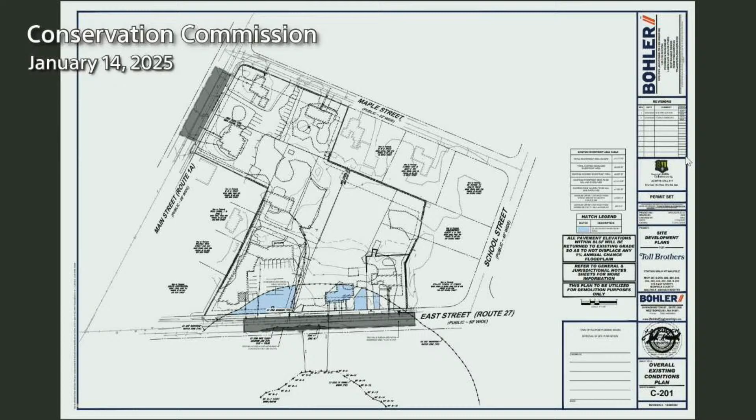Resource areas associated with this property include Springbrook, located across or south of East Street, and bordering land subject to flooding that extends to elevation 139.5, occurring along a portion of East Street. This is important because sections of East Street and Main Street will be repaved after utility installation, shaded here in dark gray, with the darker portion of East Street being where bordering land subject to flooding occurs. Those elevations will be brought back up to existing grade. There's no change in elevation proposed within the floodplain, and therefore no change in the flood storage capacity of the floodplain.

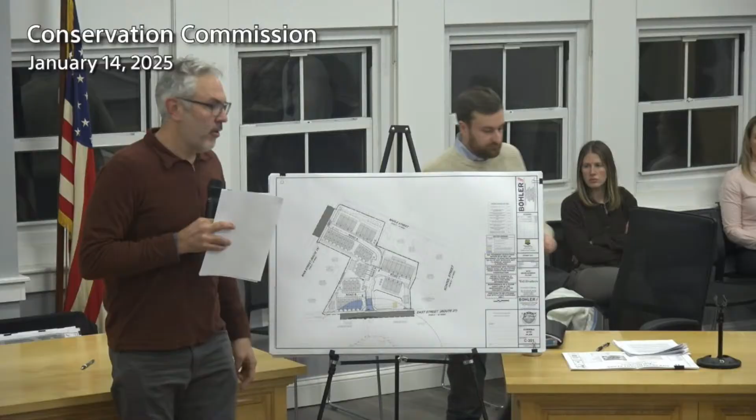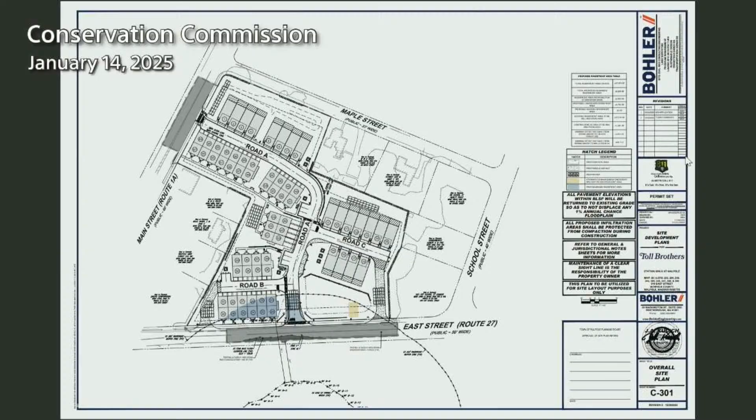Moving on to the next sheet — this is sheet C301, also up on the screen. We're proposing a 67-unit development on the 4-acre parcel, comprised of 8 buildings and a series of roadways. We have Road A, which provides access through the site from East Street to Main Street; the roadways will be 24 feet wide. We also have Road C and Road B, dead-end streets providing access to the buildings located along those. Each unit will have a 1 or 2 car garage, with access provided from the roadways.

We are proposing some site grading on the property to accommodate development. There's a bit of cut and fill — up to 3 feet of fill, roughly, and up to 8 feet of cut. The largest cuts are in large part from the stormwater basins proposed on the property.

Resource areas associated with the development that are going to be altered include the bordering land subject to flooding, which is 1,061 square feet. We also have previously developed riverfront area where, under existing conditions, we have structures, lawn, landscaping, driveways, things like that. Portions of that previously developed riverfront area are considered degraded. With the proposed development, a portion of the southernmost building, a portion of Road A, and a small portion of this access are within the riverfront area that will be considered degraded. Overall, there's a net reduction in the degraded riverfront area by roughly 2,800 square feet, so we are improving the riverfront area by decreasing the amount of degraded riverfront area in that zone.

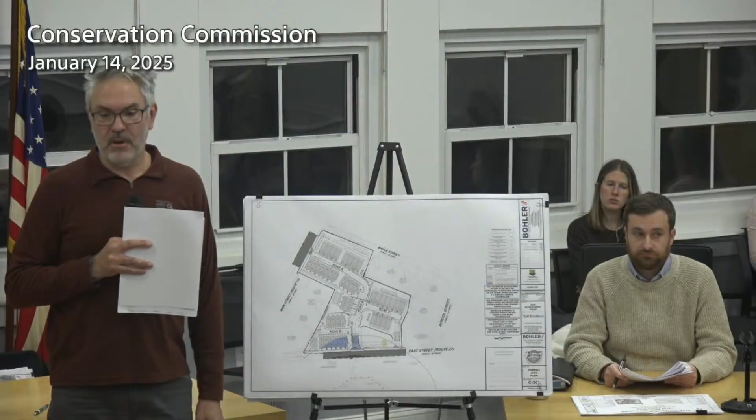Additionally, we're also significantly improving the stormwater management measures on the site. Matt's going to talk a little bit about the stormwater management that we're proposing, but it far exceeds the state regulations and state requirements in an effort to meet your local requirements. With that, I'll turn it over to Matt to talk more about the stormwater management infrastructure, the erosion control plan, and the landscape plan.

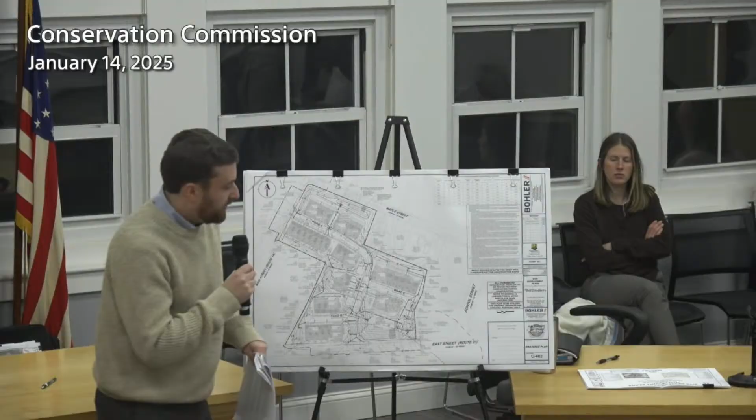Thanks, Rich. Matt Ashley with Bohler. We are now on C402 drainage plan. It'd be better if I stand over here for you guys. It's okay, sorry.

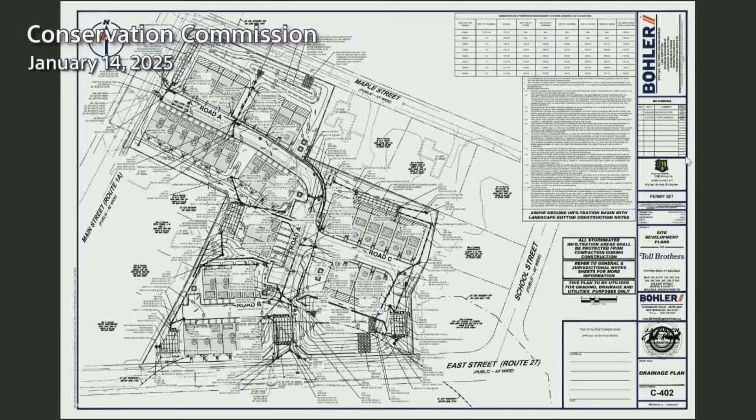So we are proposing a fully state and local compliant stormwater system out here through various BMP measures. Specifically, we have a combination of surface basins, subsurface basins, grass swales, and water quality units to meet all of the state's specific requirements in the stormwater checklist. Additionally, we have been working very closely with the town engineer, Carl, to provide above and beyond that. So essentially, not only do we reduce peak flows for the development, we are reducing volume and containing the 100-year storm on site with the NOAA plus numbers as well. So very conservative stormwater design.

The high point of the site is located right at the corner on Road B and flows down in either direction. This half of the development will go down to a surface basin located between, behind units 1 through 8. This portion is a mix going to a subsurface basin located behind units 9 through 15, and then a couple more subsurface basins located underneath the fire access roads. The bulk of the stormwater is being contained in this surface basin up front, adjacent to East Street and units 16 through 19.

Also, generally consistent with the town's regulation, we came up with a construction phasing plan, more of an erosion control plan, if I can find it. It's going to be 801, if you want to get there ahead of me.

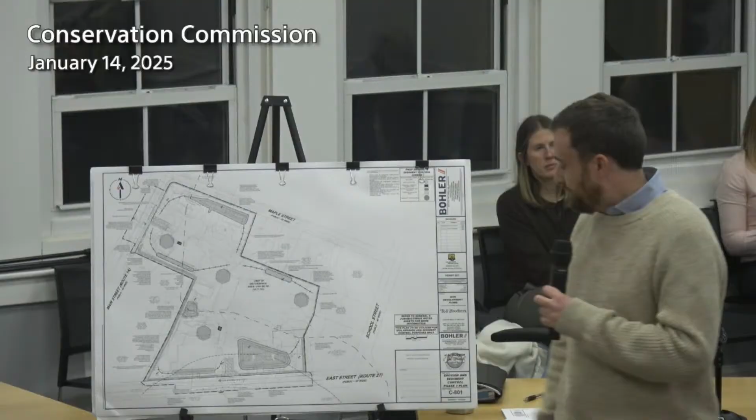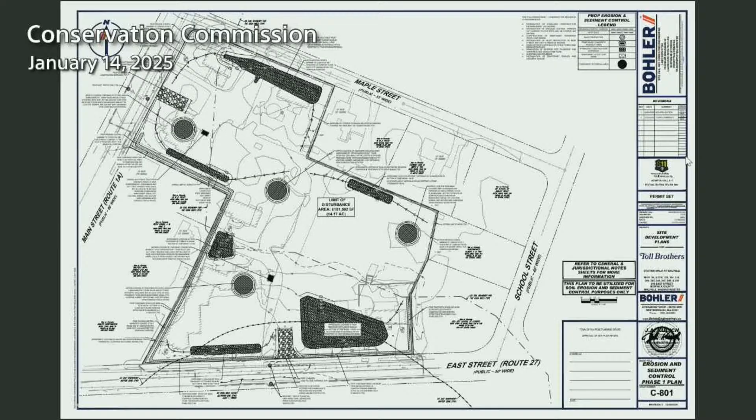The general intent of the construction sequencing is the site will be demoed from what's out there, the existing structures that Rich talked about, and rough graded and padded. In doing so, during that initial phase, we're going to set up temporary sediment basins throughout the site, like I mentioned, this is the high point here, so everything has temporary sediment basins on either side. They will rough in the surface basins during this time, not bring them all the way down to final grade, which is consistent during construction.

The next page, C802, will be the next phase. The site is rough graded, then utilities and roadway infrastructure will go in. The beginning of the first unit right up on East Street will be put in as well, kind of as the gateway to the development, along with the sales trailer located centrally there.

Additionally, working with the town, there were some additional erosion control measures. They wanted us to put in a berm located around the site. You'll see that there as an additional measure, along with your typical catch basins in the roadway having silt sacks. The driveway entrance will have a gravel area to reduce sediment getting out into the roadway. Additionally, it was noted to have an extra barrier go across the driveway if there's going to be a large storm event predicted in the forecast, along with removing the silt sacks so those don't get clogged up.

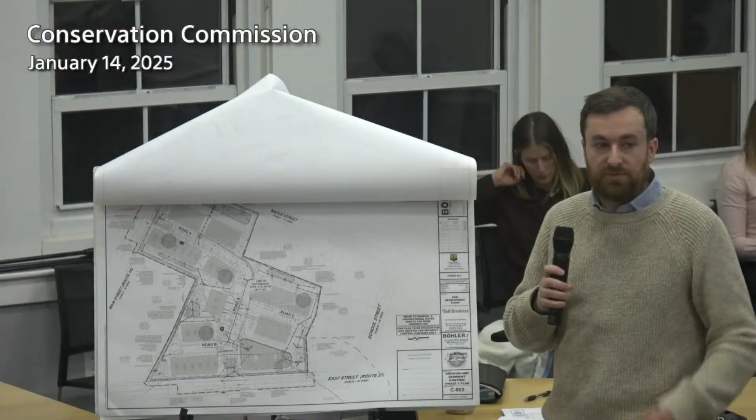The last item here, 803, is just the build out of the remaining infrastructure, housing, and units. Upon completion, all the sediment basins will be turned into final stormwater basins and removed. Also making note not to stockpile anything on those areas that had the potential to reduce infiltration.

Moving over to landscape briefly here, L101, located towards the end of the set.

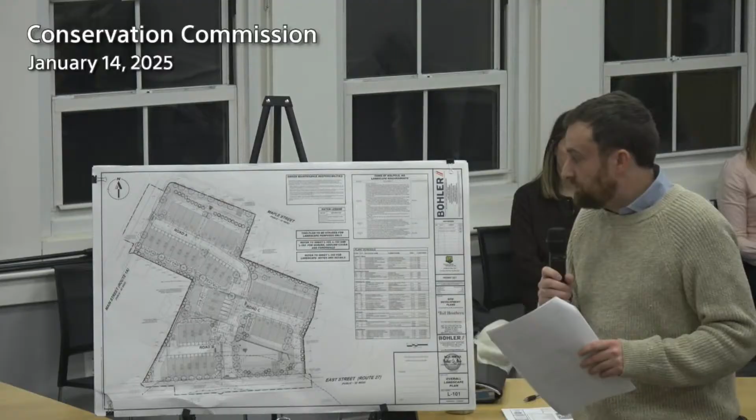Toll Brothers is proposing a pretty robust landscaping plan. We had minimal comments going through this, which I don't see that often when we review landscaping plans. Essentially there'll be over 1,000 plantings throughout the development: 53 canopy trees, over 200 evergreen trees, over 20 ornamental trees, 250 shrubs, 76 grasses, lots of ground cover, and even more perennials.

The real focus on the landscaping package from initial feedback was the perimeter of the site, which you'll see is pretty heavy. There's also the entryway into the development, creating a real sense of arrival on either side with the landscaping, and along the frontage as well. The doorway entrances also have a pretty robust landscaping plan.

In addition to that, we are proposing a low ornamental wall down there. A portion of it is actually used for retaining, and another portion is just a raised knee wall, kind of stone, again to create a nice sense of arrival when you get here.

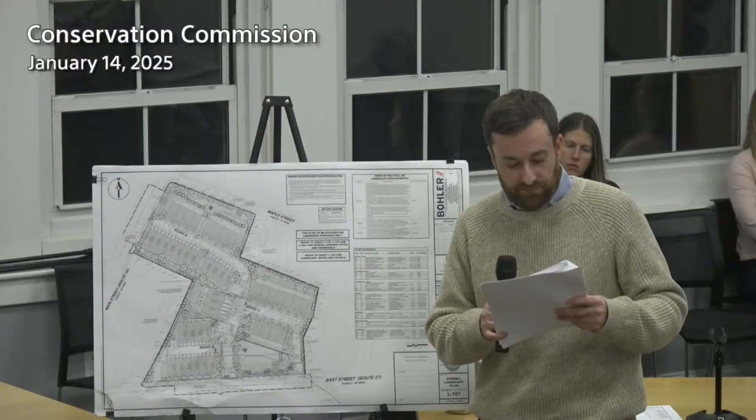Just to recap some of the updates we made from all the comments we had: the erosion control plan that I walked through with sequencing and what we plan to do there, and some additional detailing on the riverfront area, which Rich talked about.

It was requested to add dog waste stations throughout the development, so we added two different ones at equal points on the development—one located near the visitor spots by the entrance, and a secondary one out back near the corner.

Snow storage was added and detailed on the site plan. As for trash handling, there is no central trash area—every unit will have their own bins located within their garage. They'll take it out during trash day, it'll get picked up, and they'll put it back in the garage when they're done. So everything is done internally to the house and won't be stored outside at all.

I think that was largely it for the big updates from the comment letter. Carl responded today about the updates we made to his comments—in his words, the general comments were thoroughly addressed. We still have a handful of items we're working through with him and the town, but we brought his list significantly down, which I was very happy to see.

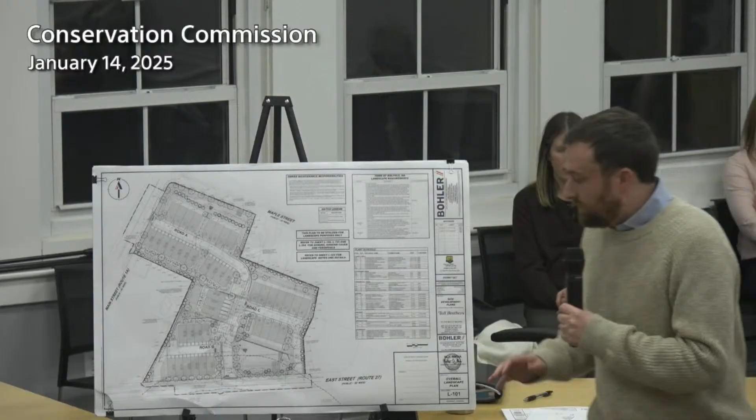With that, we'd be happy to answer any questions that the board may have. Good, thank you.

Landis: Mr. Chairman, there was a letter submitted by the town engineer. I don't think you have to read all items unless you want to, but it was summarized that most of the items brought forward early on have been addressed. There's a few things that still need to be addressed on the plan, which are listed in his letter.

There's a couple of items he included in his letter that I had also asked to be fixed with the operation maintenance plan, including an annual report form so it could be submitted to the Conservation Commission each year. One of the other outstanding items, listed as number 18 in his letter, is the off-site mitigation we were asking for to relieve a stormwater issue across from the new development.

Those are pretty much my comments at this point. I know you're going before the planning board tomorrow night, and I think it's preferable that we continue this until you work out the final plan, deal with the final revisions, go through the planning board again, and maybe resolve the off-site mitigation. But those are the only comments I have at this point.

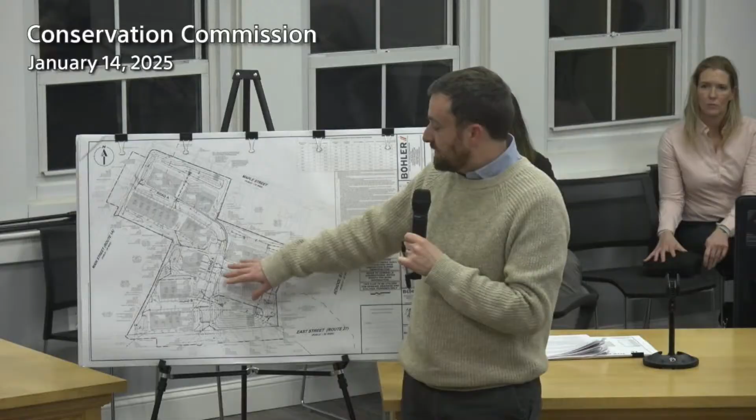There was another question, I believe, and I'm sorry, I forgot it - the method of cleaning stormwater at the catch basins. Absolutely. In the back of our drainage report there's a full O&M plan for what we recommend for cleaning. For the catch basins, it's inspections every 6 months, and when there's a certain amount of sediment measured within those catch basins, they get vacuumed out or cleaned out in some manner and removed.

So is it just water at the bottom again? That doesn't explain - how much of the oil and other trash is collected there, and what's the device you're going to use?

I think the final device used will ultimately depend on the maintenance company contracted for this. Historically, what we've seen is there are sumps and hoods in these catch basins, so trash floats on top of the water. The hood makes sure the pipe is submerged so trash doesn't get into the pipe network, and oil floats on top of the water. In that scenario, typically a vac truck will come in and vacuum it all up into a tank and take it off site to dispose of appropriately.

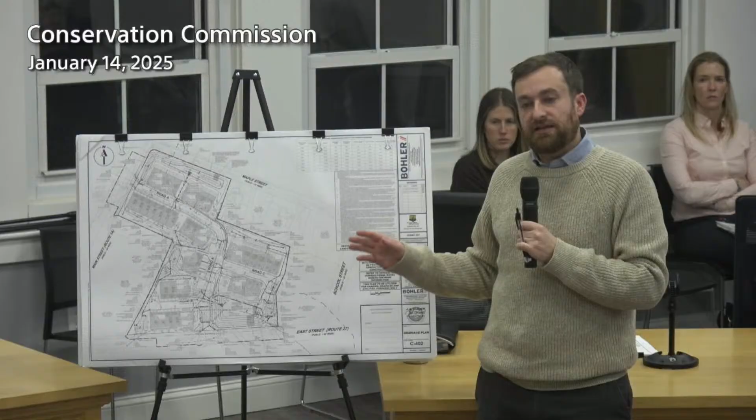That doesn't tell me who the manufacturer is and what device. There are several devices on the market and I'd like to know which one you're choosing. Good question - I believe our detail specifies a device or an approved equal that the contractor should be using. An approved device - what approved device? You're not getting it.

Maybe we could have a special condition that requires Toll to notify the Conservation Commission of the actual apparatus that's going to be used. You mean the type of machine that's going to clean the catch basins? No - okay, so just clarify what you need, Al.

There are several different catch basin designs, brands, oil water separators - there are several of them on the market. It's usually specified on the plan which one they're going to use. So you want to see the detail of the catch basins? Okay, apologies, I misunderstood the question.

We do have the specified product detailed on our construction details in the C900 series. C900 - Carl was very specific about making sure this was on here, probably a typical comment.

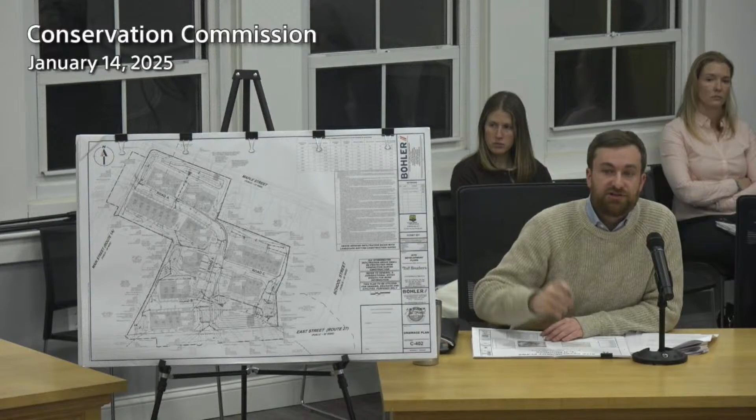Okay, so if we get to a 100-year storm event, Springbrook may be in trouble too, overflowing. Keep in mind, one last comment to really nail this point home - we also have a foot of freeboard designed in our basins as well. So even above the 100-year, we still have more storage. We did go over that with the town engineer.

Betsy? I know you've got further to do with the planning board, so maybe we're not talking about this tonight, but improvement to the Springbrook riverfront is important, and I don't think just some plantings, which were gonna happen anyway to show an entrance, do it. So I'm actually in favor of something to do with the storm sewer that is not handling runoff properly in front of Springbrook should be included.

I may have missed it earlier, but is this maintained as a private development? Yes, it is. Okay, so there'll be a homeowners association - that's correct. And those are the ones, the association is responsible for maintaining the structures. There's been a raccoon infestation - I don't know if this is the right place to address it, but they've had people out to address the rodent issue, mainly raccoons. Is that something, should I address that tomorrow night?

Yeah, I think we all love raccoons at our house. Come on, six units in our place.

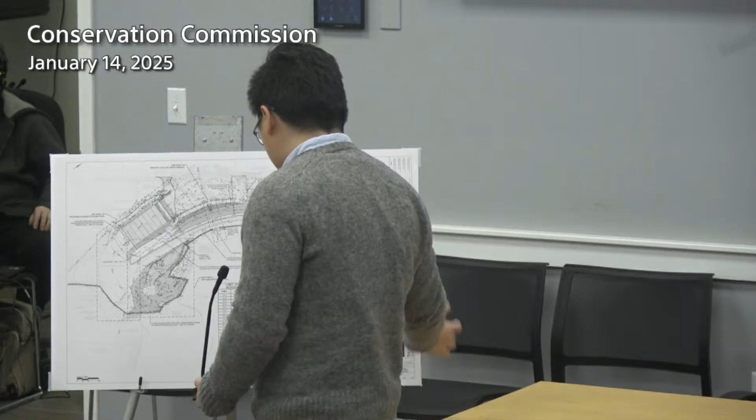Our phase is to try to rehabilitate that. So let me pull up this proposed conditions plan real quick. The first thing we have to do is make sure that the pond contains the water associated with that federal design criteria, which they call the freeboard hydrograph, which turns out to be the probable maximum precipitation flood.

We're on sheet 7 for the proposed site plan, in the big set and what you handed out tonight. What we handed out tonight is just a copy of what we have for poster boards, but the plan set is the plan set. So the first thing is we have to make sure that the pond holds the amount of precipitation needed for that PMP.

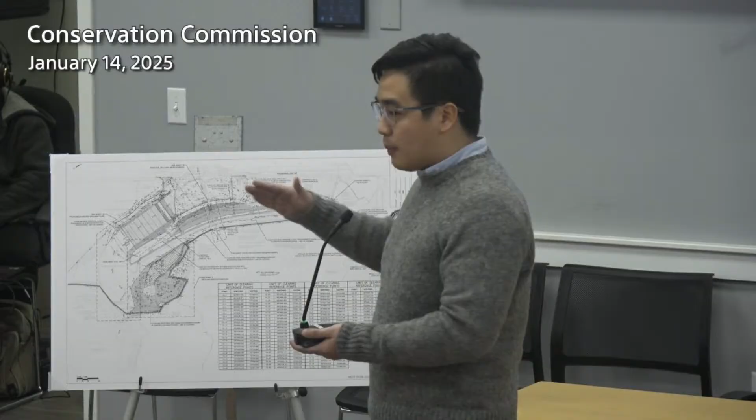So we're raising the dam a little less than 2 feet. Another portion of that is because we're raising the dam, we have to meet slope stability requirements on the downstream slope, so the slope has to be buttressed out towards the downstream side. Additionally, the perforations of the toe drain, the internal drain structure inside the dam, do not meet federal requirements right now, so we're also proposing to dig that out and replace it with a new toe drain that would meet federal requirements.

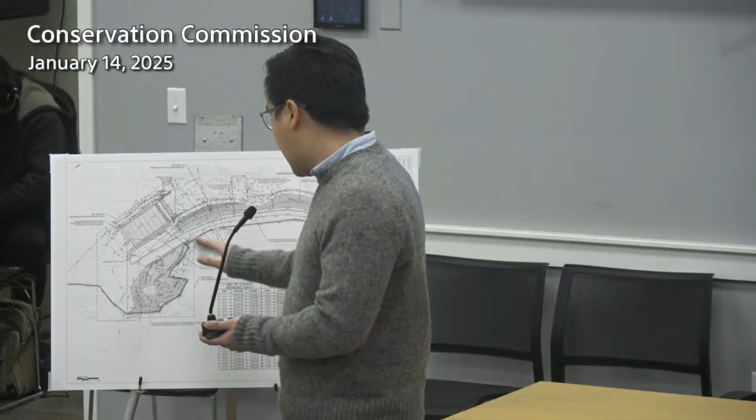Moving back to the internal drain structure, I have this section for you folks. As you can see, we're raising it 2 feet, but to maintain slope stability, we're going to need a 3.5 to 1 slope that buttresses outward to the downstream slope. That's a little shy of probably around 20 feet towards the downstream slope.

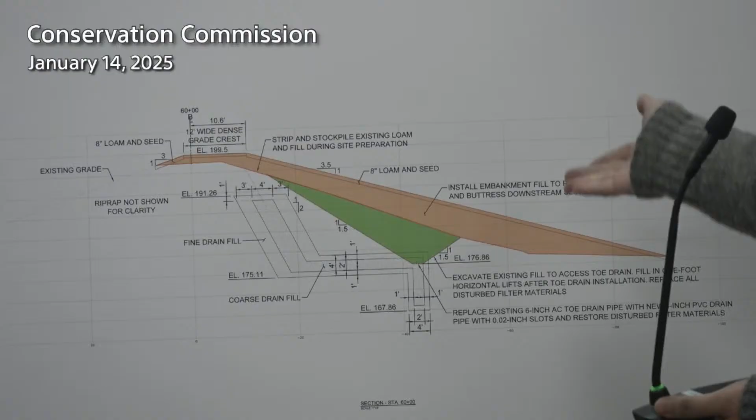The orange is what we're filling in addition to the current geometry of the dam. The green shown here is what we're excavating from the existing dam to get to that toe drain and replace it.

Additional impacts because of that dam raising and buttress: there's an existing concrete structure right here. This is the primary spillway where regular flows flow into and out to Spring Brook. The concrete structure, because we're buttressing the slope, has to get pushed further. It's a very old concrete structure, and we can't just pick it up and move it without significant damage, so we're planning on demolishing the existing structure, extending the pipe, and replacing it with a new concrete structure at the new toe of the dam.

In addition to that, we are adding an access bridge towards the inlet of the dam, so it's easier to access the controls and maintain the flows of the impoundment and do maintenance at the inlet. Right now there's no access bridge over there, so the folks at the town have to take a small boat to access those controls at the moment.

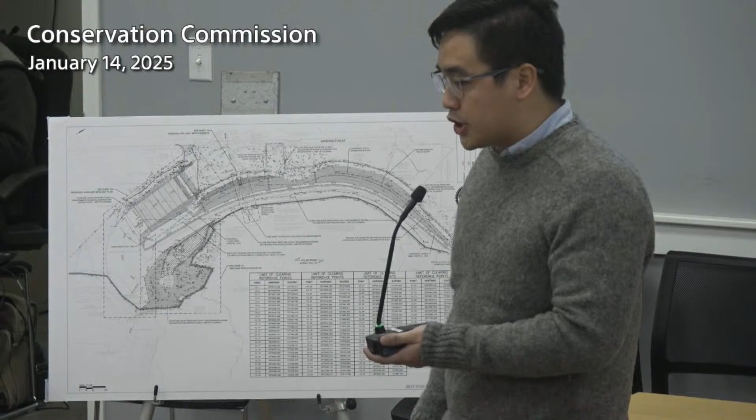In addition to that, current dam safety regulations guidelines recommend that we remove trees 20 feet from the dam embankment portion, so there's a lot of tree clearing associated with this at the downstream toe, all the way across over there. And because this acts as a barrier for debris to get stuck when this tries to activate, we're going to have to clear the trees all over this portion as well.

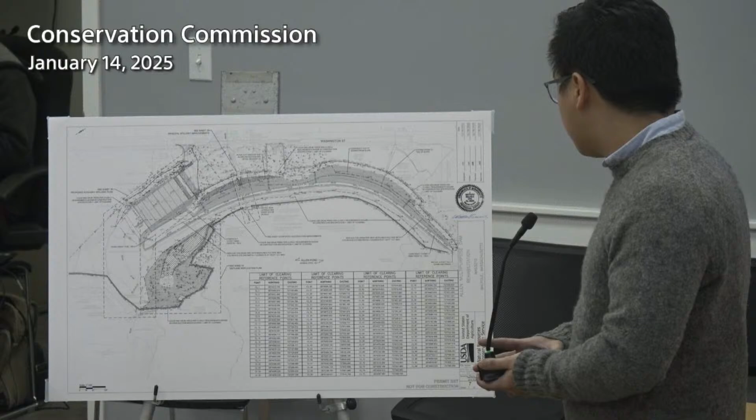But other than that, that is the proposed conditions currently designed for the dam.

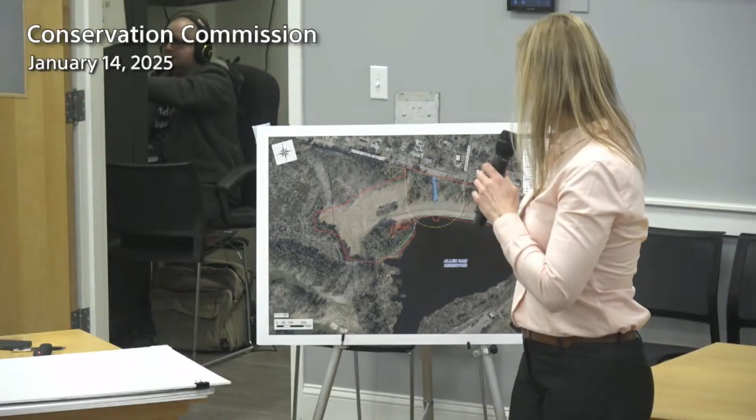Beginning on the northern portion of the dam is sort of the easiest resource area to see. This is a flagged bordering vegetated wetland.

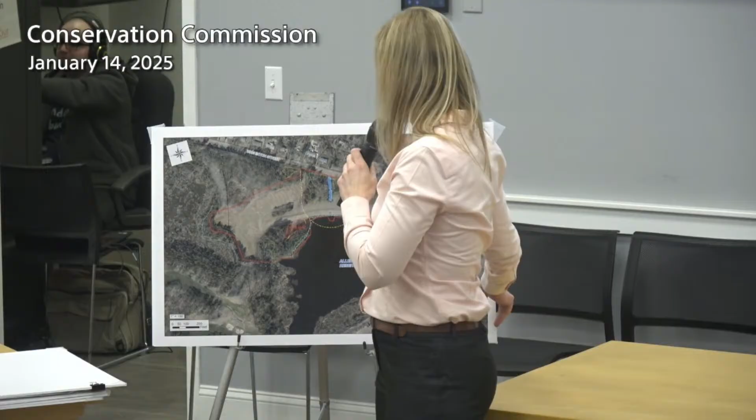Are you on the first or second one of these? I am on the first, or I'm on the second. Let's see, on the backside of... yeah, on the backside. There you go, yeah.

Beginning in the north, you have this bordering vegetated wetland that's flagged, and it works its way up to what were previous embankments related to an access way to the dam. On the other side, also a second bordering vegetated wetland in green flags. You'll see a dotted red line just outside, squaring that off. Those are the flags we altered when PAR went back outside and checked the flags for the site. We saw that the resource area was actually bigger than initially flagged.

That's the new expanded resource area. In the center is Spring Brook, which is the downstream portion, riverfront area, and also land underwater to be altered because we're going to be installing that extended primary spillway.

You'll see in yellow, there's the buffer zone, and also in purple, we have buffer zone around the outside. Green flags encircled in orange, also along Washington Street, is an isolated vegetated wetland.

Working the way up the spillway, this is somewhat of a complicated wetland complex. From the water's edge here at the bottom, there's a small bordering vegetated wetland that was flagged. It has a stream connection, an intermittent connection to a secondary bordering vegetated wetland. We think the water generally flows from the pond in and out.

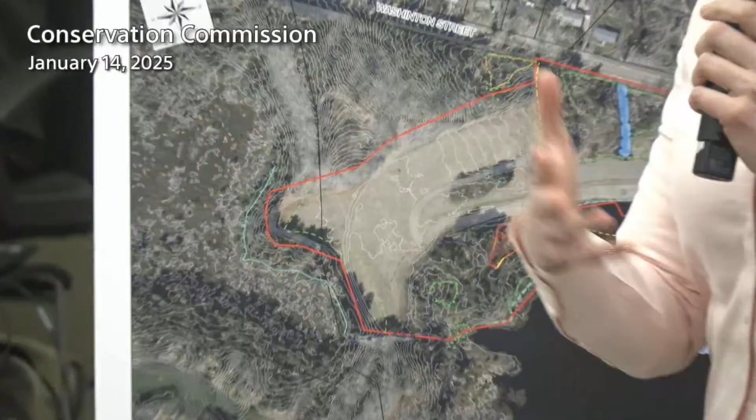There's an intermittent stream that connects to this green circle. We saw some flow here between these two at the bottom. There's an outlet, and we think it probably would flow up and through based on the topography of the site, and also the way the vegetation has traveled. There's some invasive species up in this top corner that really wouldn't have any other way to get up there if it wasn't traveling by water, and that's why you have it labeled as bordering vegetated wetlands rather than isolated wetlands. That's correct, right.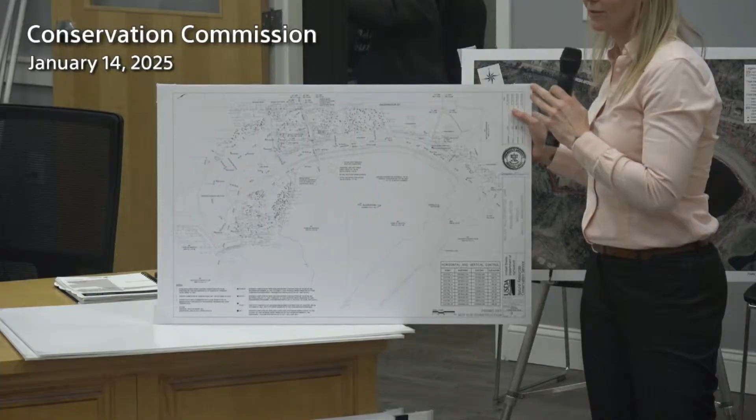This is the plan as presented, sheet 3, and this is the one we know we got feedback on. It has all the same wetland flags. They're numbered on this plan and also shows all of the trees. There are trees in the wetland, and there are trees throughout this area along the pond that are going to be removed as part of the dam design, just as Victor mentioned.

We want to make sure we're really clear about that because it's not something that's regulated by the Wetlands Protection Act. However, it's definitely going to alter the landscape, so we don't want anybody to be surprised.

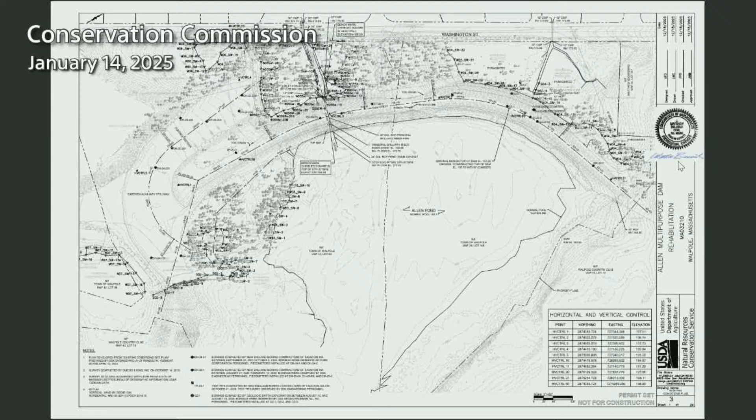Okay, now moving on to sheet 7. On sheet 7, you can clearly see where the alteration is planned for the dam. As Victor was saying, the change in slope on the downstream side of the dam is going to actually require us to push the slope into these two bordering vegetative wetlands on either side.

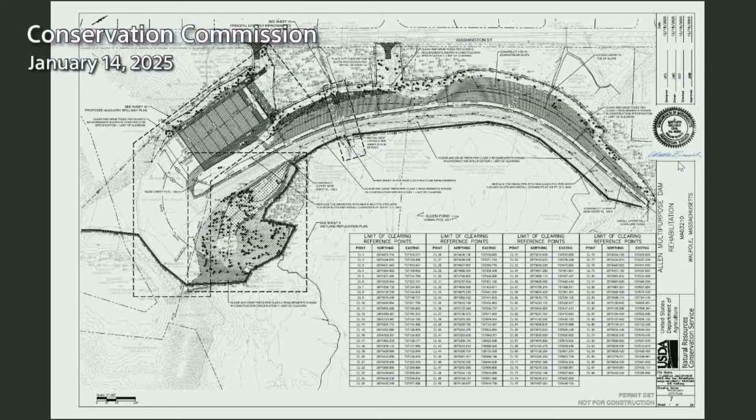So you'll see in red, we've outlined this is the permanent impact to BVW to be filled. And then in the orange color here, right outside of it, is temporary impact, likely going to be used as part of the limit of disturbance for construction vehicle access as they're building that new dam grade, the 3-to-1 slope.

In addition, there's small impacts to the land underwater, again related to the principal spillway. No anticipated impacts except for some temporary related to installing erosion controls and maintaining the site on the upstream side of the dam.

So you'll see here, this is the shape generally of the proposed replication area. The idea here, of course, is to connect it to the existing bordering vegetative wetland.

Just as an aside, because I think the question will come up as far as the limit of work right here, we have this small shoreline section that's not included in the limit of work. One of the reasons for that is that the geometry of the auxiliary spillway is exactly this, so the design follows this line right here. We're trying not to impact more of the shoreline than we absolutely have to in this case.

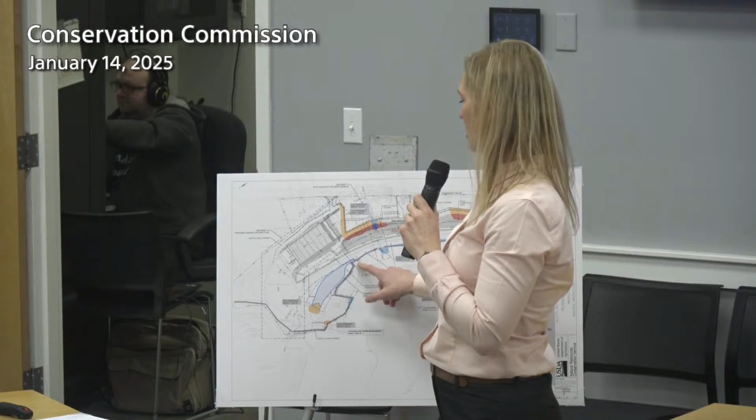It's also true that there have been some archaeological fragments surveyed and discovered as part of the survey work for this site for the federal government review, and we're pending additional survey to understand a little bit more about what's there, but we know generally this is the site, so we tried to give it as much space as possible without impacting it.

So that is the proposed impacts here to the site. The project is going to be subject to a water quality certification. It is a limited project under the Wetlands Protection Act, so the fill is allowable because we are maintaining an existing dam.

However, we do need to mitigate for a certain amount of the wetland to be impacted for the water quality certification. So the replication plan shows something of a basin on the right against the dam structure itself, and there will be some very low plantings installed in that basin for the purpose of maintaining the spillway design requirements.

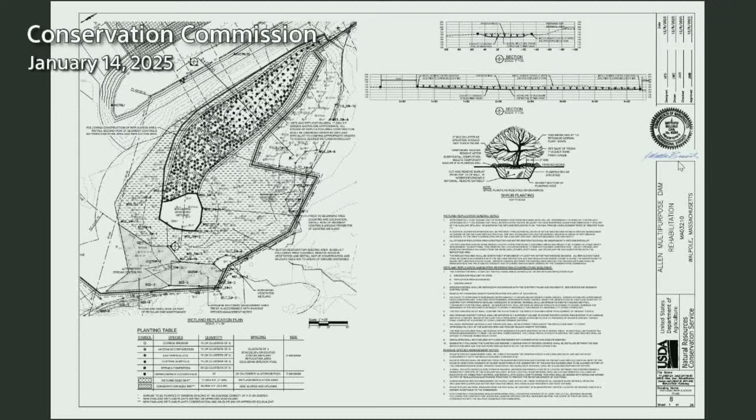Just as Victor said, we're not allowed to replant trees. We have to maintain a certain height of the vegetation, so we had to choose plants that were going to continue to be small so that they would not become an obstruction in the event that the spillway is activated.

And then as we're moving out, we have these cluster plantings all set in 3 that are intended to encourage wetland species to grow and also connect to that bordering vegetated wetland here. This whole portion outside is going to have to be maintained with conservation seed mix.

Part of the mitigation includes the removal of a small section of Japanese knotweed that's taken hold right here on the corner. We'd like to try to take that out as part of this so it doesn't have the opportunity to really take hold and do a lot of damage on the shoreline with all of the earth work that's about to take place.

So with that, we're happy to answer questions and go through any of the slides that you're looking for. And we're looking forward to continuing, and we'd really like to come back on January 28th if possible.

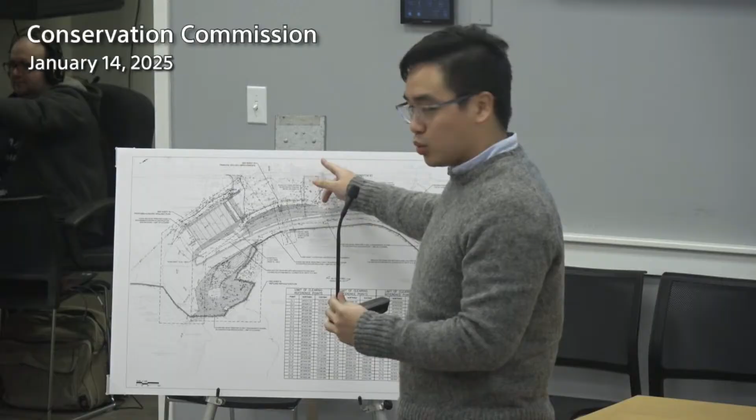So currently, there are 2 access points to this area. There's one over here with a swing gate, and then there's one clearing over here. Personally, I found the parking here much more safe coming in and out because it's a much larger area rather than backing up into Washington Street.

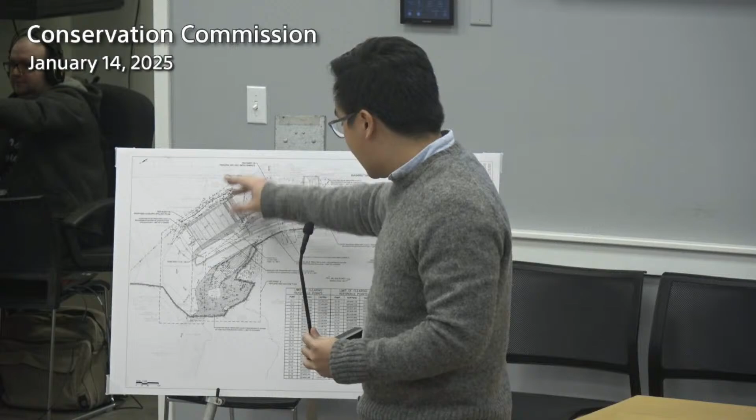We were discussing it with Carl a couple of days ago, but this retaining wall can be pulled back so you can maintain access. Unfortunately, we still need this terminal structure, so we're trying to figure out access over here, but this access will be maintained for construction and future purposes. With the tree clearing, it's going to be much better, and we can negotiate grades if we need vehicle access, but this is definitely still traversable by foot.

Access for maintenance - if you're coming in this way, is there gonna be access along here to get to this rear part? Right now, it's only a clearing. We're looking at the grades here - it's kind of steep. But after discussing with Carl, we may be able to modify the slope right here, so it's a much more gradual slope to the top of the dam, and you can access everywhere else from this access point.

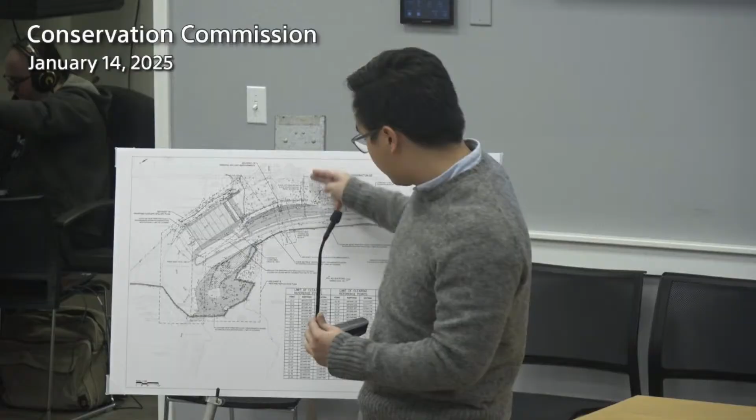And another question was with, I think the larger set plans, I can't remember what sheet you had, potential staging areas, and there was a bunch of them.

On the big set we submitted previously, it's not there, but it is in this poster board in the 11 by 17s that we sent you. We have these highlighted. So based on discussions, we're gonna try to make use of this disposal area that they used for the construction of the dam. That's 6 on the set, Sheet, 11 by 17.

Yes, so we're gonna try to use this clearing in the auxiliary spillway as much as possible. This is kind of within the 100-year storm, but we're gonna try to use this temporarily as well. There's a larger section of the dam right here that we're gonna try to use, and then closer to the access point here, there's a couple of staging areas that we're gonna try to use over here in green.

So your plan is labeled potential staging areas? Yes, but you may or may not use all of them. I know when I was out there, there was just... I think originally it was discussed clearing that whole first entrance and using it as the staging area, and I was sort of objecting to that.

Correct - to take all those mature pine trees as well, it's kind of the entrance to Allen Pond that you see as you're driving down Stone Street, and it's what people know as that area. So to have all those trees taken down for staging purposes seemed like a shame. Understood, and we did pull that back so you can see we're maintaining all the trees over here that we discussed, and we're limiting it to 20 feet from the dam.

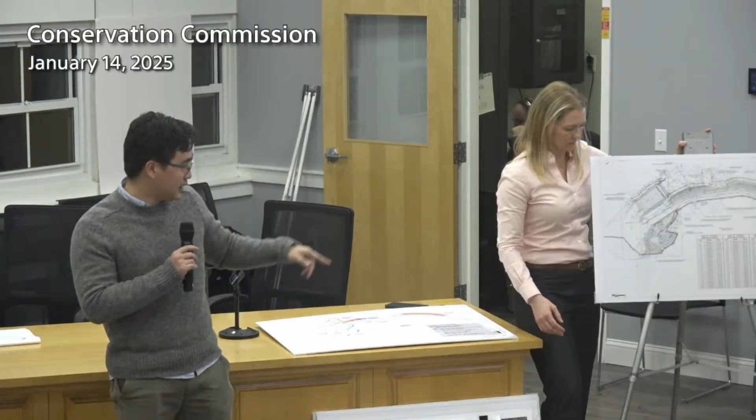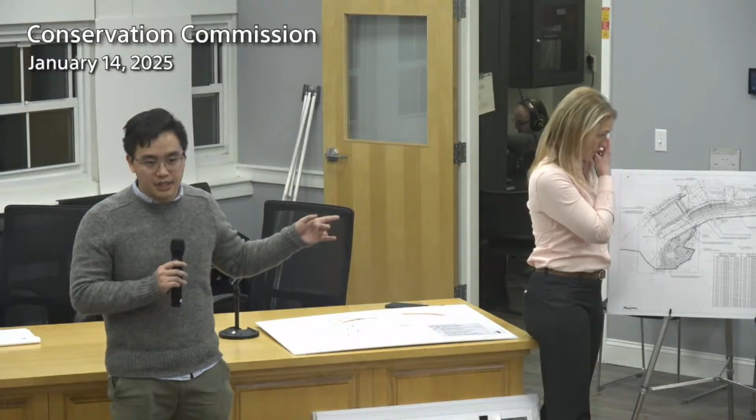If you pull the tree out of that, is the flow gonna increase? No. My understanding of why the riser is there: it's actually at the same level as the auxiliary spillway. The weir at the top of it is at the same level as the auxiliary spillway. Historically, the auxiliary spillway hasn't activated yet. It only activates during the 100-year storm. So maybe you'd see a little bit more flow over there, but it's limited to that 36-inch pipe that's coming after the riser.

So the normal flow out on a normal rainstorm isn't gonna change. Did you say that construction equipment and the construction employees will be parking off the street?

Hopefully there's enough clearing here, depending on how many guys and vehicles they have, that we can make that parking work. Additionally, this space is still here, they'll be working mostly over here, they wouldn't need this access. Not much room there, and not much room facing Stone Street. Maybe five cars. It doesn't take too many cars to fill up that little parking spot.

Is that gonna be, what happens during construction as far as public access? I think as far as public safety goes, we would have to close down the site during the work. So that should be somehow posted so the public is aware of that? Yep, whenever it goes out to bid, the contractor will be aware of that.

But you need to provide off-street parking for the workers. Yep, good point, we will try to review it. Again, we're trying to limit the tree clearing over here, there's a bunch of trees over here, and we're also trying to prevent the cars from getting into the workspace.